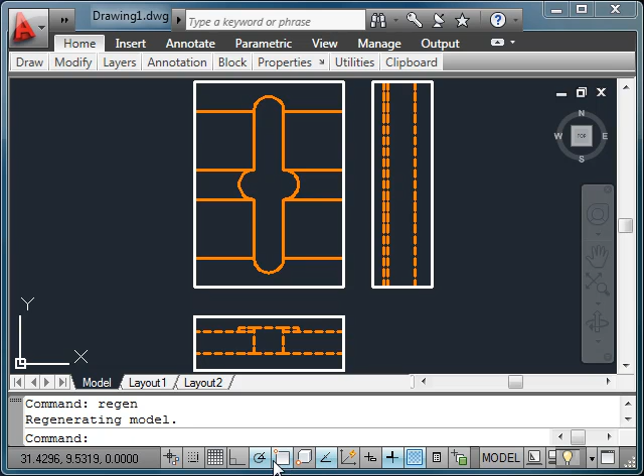Next thing I'm going to do is I'm going to just use my mouse wheel and just zoom in just enough here so I can begin to see some of the edges. Now traditionally we could extend this line here and do a trim, but then we'd have to change the property so it would match. So let me show you how we could do that much faster.

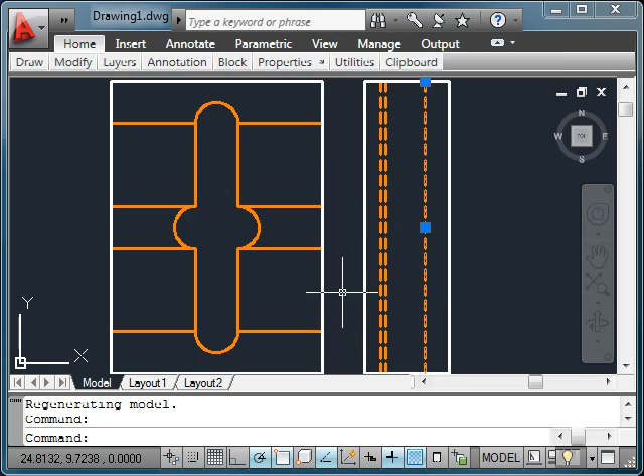I'm going to go with a single click. I'm going to select this dash line because I want to start drawing dash lines in that color and on that layer. So if you pre-select an object that you want to use as the source, just right-click anywhere inside AutoCAD, and from the pop-up menu, you will find the option Add Selected.

Now, Add Selected simply means that I'm going to draw a similar object, which in this case happens to be a gold dash line with this weight.

Next thing I'm going to do is I'm going to specify where to start my first point. Now I could just simply snap to this point and line it up all the way across, but can you see what happens if you hover over the end point, wait a second, begin to move your mouse to the right, can you see that there is a tracking line that appears?

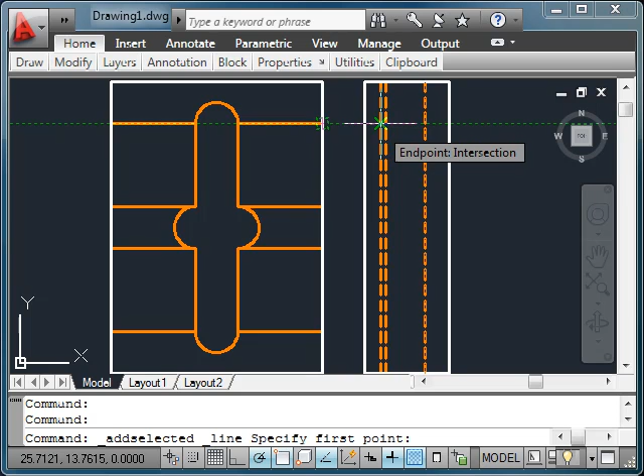Well, just keep moving your mouse across the tracking line until you get the very first edge. You'll see a green X. When it appears, click the left mouse button, and now you're drawing right on that edge.

Now, we're going to track again 90 degrees, so make sure it's nice and straight. And when you see the X there, go ahead, click the left mouse button, and now we drew that first segment. Press the escape, so we're done.

Now, because the Add Selected tool is activated, I can use my space bar. And watch how fast we can do this. Go ahead, press the space bar. Notice the command Add Selected.

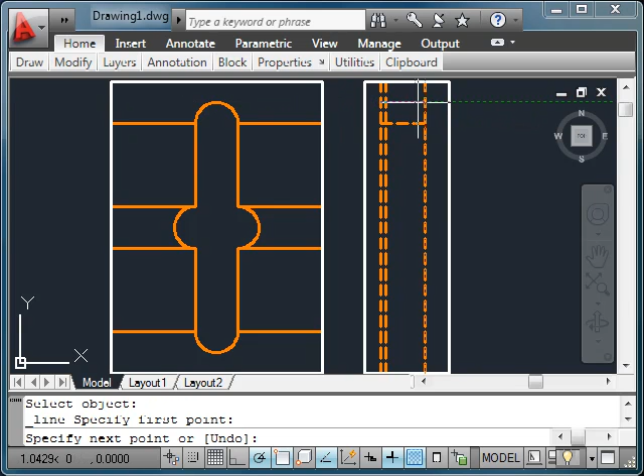It's going to ask me now to select the object. I don't have to pre-select it. So I'm going to select this edge here, and then I'm going to say I want to line it from this quadrant, use my tracking line, come up to my first edge, all the way down to the back edge here, and then press the escape.

So very quickly I can press the space bar, select the dash lines, find the point that I want to align it to, follow along the tracking line, and then go ahead and place my segment from one edge to the edge. This make sense?

Well, you think we're done? Well, I'm going to let you finish up this drawing here. You can kind of use your imagination. But let me just show you something else here.

I don't want to use the trim command to trim off the excess. So I'm going to use these grips. I'm going to select my lines when there's no command active. And notice these little blue squares are grips.

Now I can use my grips to very quickly click on it. It'll turn red. This is my hot grip. This simply means it's now active, and now I can drag this right to the proper endpoint of where I need to go.

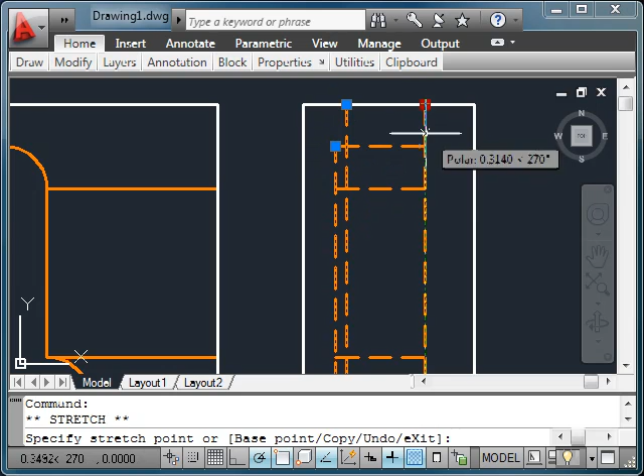Now again, with a single click, you click on top of the grip and then move your mouse to where it needs to go. And now when you're ready, you press escape.

And look how fast I was able to get this detail without having to do the trim command, the extend command, the match properties. Now that's how you draw quickly, productively, and efficiently.